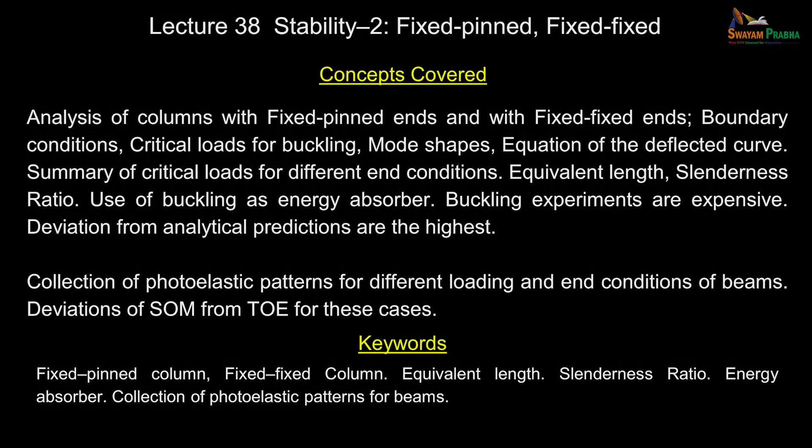Let us continue our discussion on stability. The whole idea is when the column reaches the critical load, without a warning, it buckles. That is where the stability problem becomes very critical, and you need to find out the critical load. If you don't know that, you will have surprises in your structural response. So how do we handle a problem related to stability to start with?

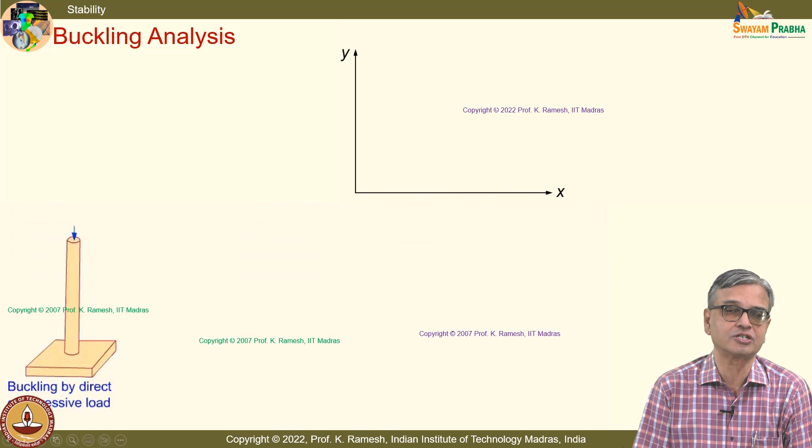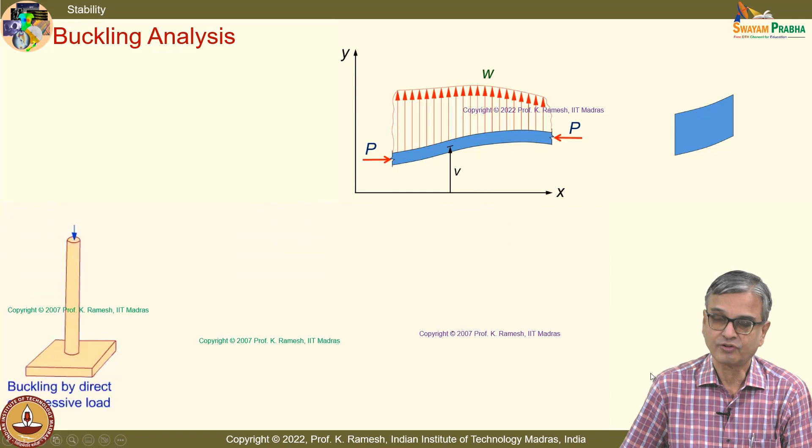Mathematically, even though we have said we are going to live in small deformation, in order to investigate stability, you take the beam as bent. That is very, very important. When the load reaches a critical value, without a warning, it buckles. Buckling can happen in a column like this. It can happen in a beam. It can also be precipitated by a shear.

In all these cases, what we have done is we have deliberately taken this as deformed, and only when it is deformed, we are in a position to take an element. You get an extra term, the compressive load separated by a small displacement delta V. On the other hand, when we analyze a beam for deflection, we have consciously taken this as undeformed configuration. You get the point? That is the fundamental difference.

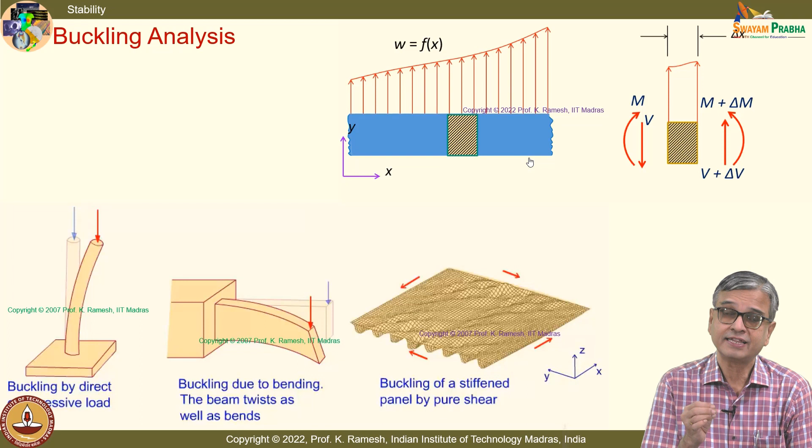When we did the deflection analysis, we did not consider the beam as deformed. We solved it in undeformed coordinates. On the other hand, when you come for buckling, we consciously take that as deformed. Only then are we in a position to write the mathematical expression.

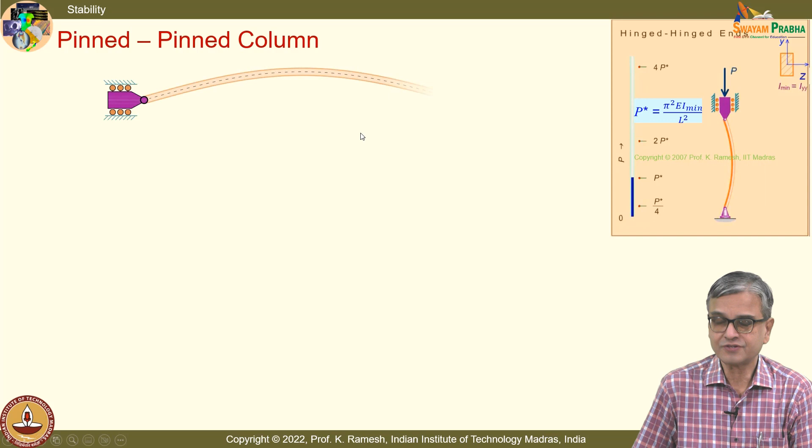First we looked at the fixed-free case, that is a cantilever. Then we moved on to the pinned column. And actually the pinned column forms the basis. If you look at the critical load, I have also put this as P star, that's equal to pi squared E I minimum divided by L squared. All the other cases are compared with this P star.

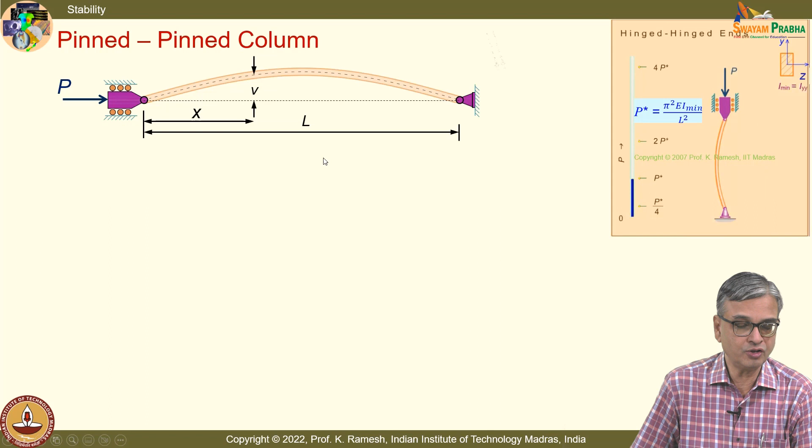The boundary conditions are very easy to write, because I have a pinned joint: at x equal to 0, V is 0; at x equal to L, V is also 0; and at both ends, the bending moment is 0, which in turn gives d squared V by dx squared equal to 0. Even though I have written EI d squared V by dx squared, you should read that as d squared V by dx squared, as simple as that.

What we did was, we got the governing equation, and we did not solve it directly - we took the solution from the mathematical analysis, and then simply took V as C1 plus C2x plus C3 sin lambda x plus C4 cos lambda x. I have 4 constants and I have 4 boundary conditions, so we had enough data to proceed.

When we substitute the boundary conditions, you get these expressions. See, this is not in one order, so you have to figure it out - that's also a good reason why you have to apply your mind to unravel this. From problem to problem, it is slightly different. Intentionally it is done so that you stay alert.

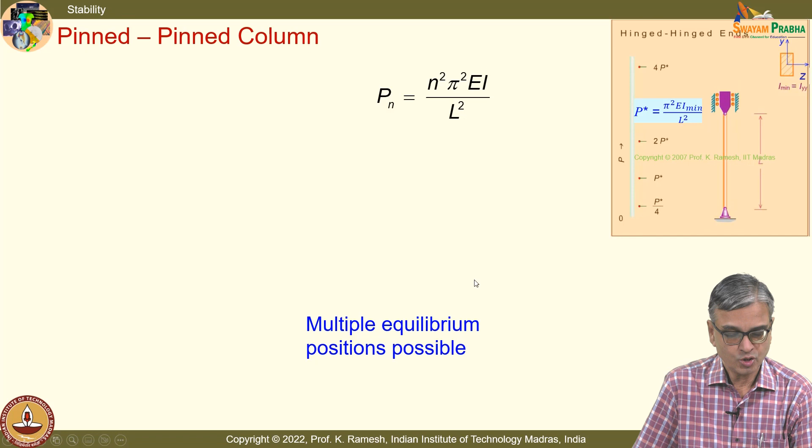In order to have a non-trivial solution, I need this determinant to go to 0. That gives me an expression wherein I get the critical load as n squared pi squared EI by L squared. You have multiple equilibrium positions possible. When n equal to 1, I have mode 1, which has a buckling shape like this: pi squared EI by L squared.

When n equal to 2, I have P2 as 4 pi squared EI by L squared. That means if I increase the load, you are expected to get that mode shape. In practice, you will have to do something - this is the point where it crosses 0, so you have to make this 0 externally. Only then, in buckling problems, you will see that.

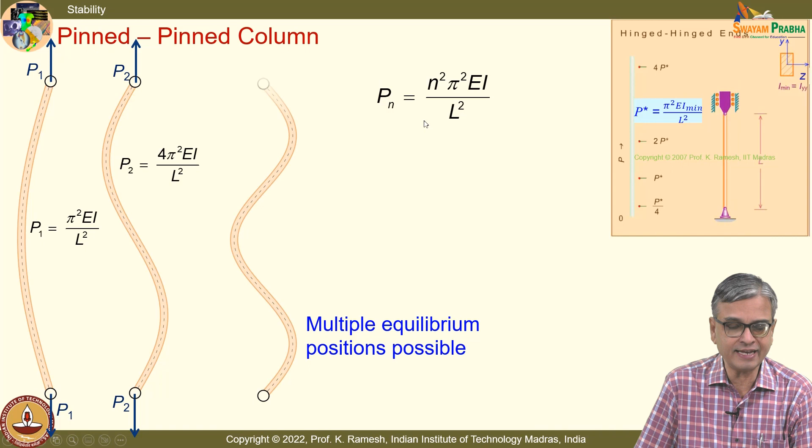I will also show you in an experiment what we have done. So what you find is, as n increases, you have different equilibrium configurations. The column cannot remain straight - that is the understanding we get out of it.

So the critical load is the least one, pi squared EI by L squared, and it is better to recognize I as I minimum when I have a non-circular cross section. In a circular cross section, every diameter has the same value of moment of inertia, and it can have buckling in all 360 degrees.

Once you solve this, you get the displacement as C3 sin lambda x, and as I mentioned, you are not in a position to calculate the value of C3. It is indeterminate, mainly because we have linearized the governing equation.

The moment curvature relation was non-linear. In deflection, we said we are going to live with small deflection and ignore the second order effects. The same approach we have followed in buckling also.

In fact, if you consider the non-linear relationship of moment curvature, it is possible for you to evaluate, for a given load, what is the coefficient C3.

If you look at the buckling problem, what is more important is the value of the critical load. How the buckled shape looks is of secondary importance, because the functionality of the column is already disturbed. So the primary importance is to get the critical load, and we also do not have the mathematics to investigate what happens once the critical load is reached, because the deflections become very large.

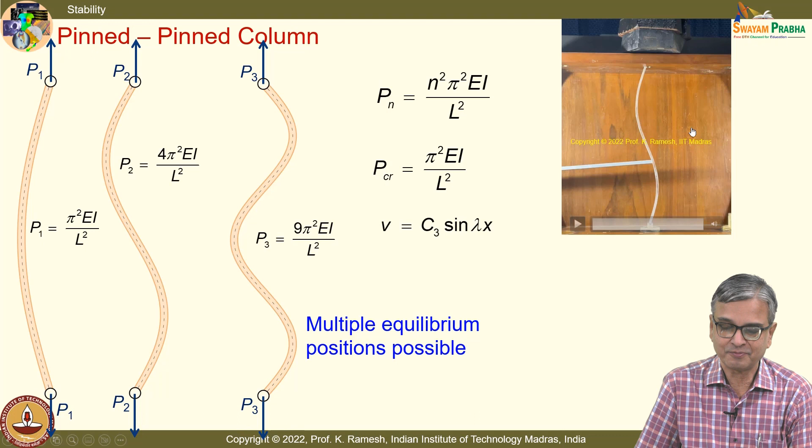This shows experimentally I can get mode 2, but I have to do something for the inflection point, only then I will be in a position to see that. Sometimes you will see such beautiful curves that you will wonder, can a column which looks so strong otherwise have a shape like this? In order to drive home that point, we have got this experiment done, and it has come out beautifully.

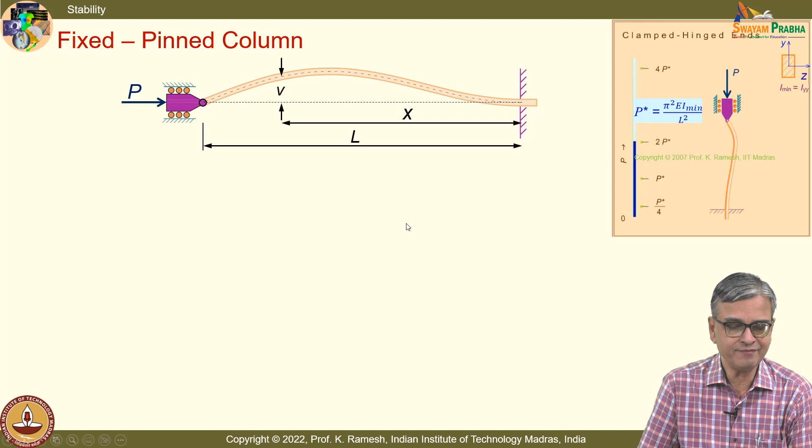Next, we move on to the fixed-pinned column. What is the difference? Only in the boundary conditions. You have already seen how to handle a fixed end and how to handle a pinned end. So it's a question of the equations having a different form, that's all, and you have to simplify them. I leave that as an exercise, but I will show you the final results.

You have the boundary conditions like this, and this is the solution we start with. When you substitute it, as I have told you, this is not in order, so you figure out whether the equations are correct. That's also an exercise for you, to see that you have followed what is done in class.

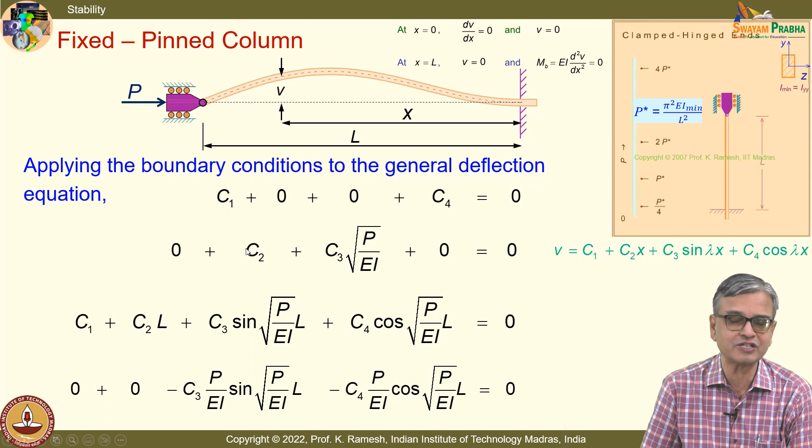As we have seen earlier, for a non-trivial solution, I need this determinant to go to zero. What happens is, we have handled fixed-free, that's a cantilever, and the equation was simple and straightforward. When we looked at pinned-pinned, the equation is also very simple. But once you come to fixed-pinned or fixed-fixed, the equations are a little more complex, and you will have to apply your mind to solve it.

So what I am going to do is have this go to zero. You have to recognize this should be translated into: tan of square root of P by EI times L should be equal to square root of P by EI multiplied by L, and this needs to be solved. One can solve it easily by a graphical method, or analytically also you can solve it.

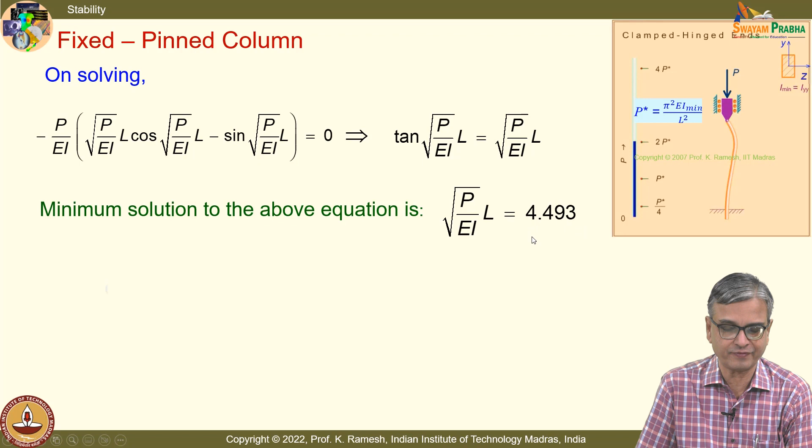And when you solve it, this happens to be a value of 4.493, and it's inconvenient to look at as this number. We'll also simplify it. So the critical load is obtained as 20.19 EI by L square, which is approximated as 2 pi squared EI by L square.

I have an ultimate objective: we are going to take the pinned column as the basis. From the length of that column, we will also visualize the length of other end conditions. Buckling is one problem where the critical load drastically changes because of the end conditions.

And in reality, how do we have these end conditions realized? We will also have a discussion on that. From that point of view, if you want to compare, rather than looking at this as 20.19, it is convenient for us to have this as 2 pi square, because pi squared EI by L squared is your basic expression.

So I can say what is the value of the equivalent length of the column. And once I go to the deflection curve, it's a very long expression. Please make a note of this.

I have this as V equal to C3 multiplied by minus square root of P by EI into X, plus sine of square root of P by EI into X, plus tan of square root of P by EI into L, multiplied by 1 minus cos of square root of P by EI into X.

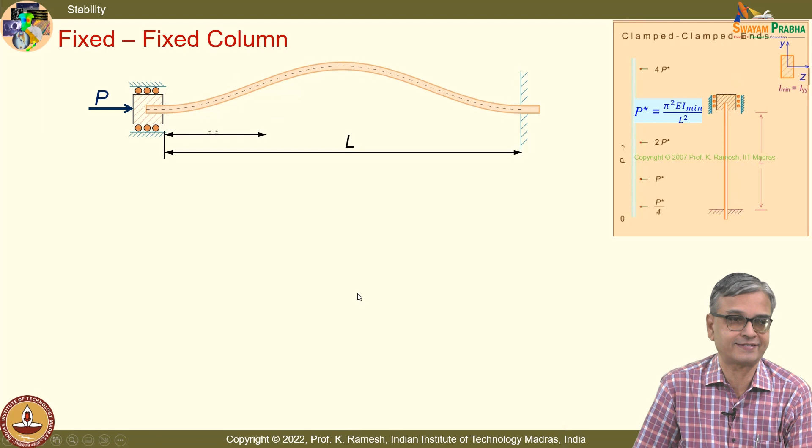Then we move on to the fixed column. Once I have a fixed column, you will recognize that you also have slope 0 at both ends, so the boundary condition is like this. All of this we have looked at even when we discussed the principle of superposition, when we wanted a deflection and recognized a fixed end, a pinned end, and a free end. We have learned how to write the boundary conditions. So the boundary conditions remain the same, but the governing equation is different.

The governing equation, what way have we obtained it? We have deliberately looked at the deformed configuration. This is the only problem in this course where we write the governing equation by looking at the deformed configuration. So that is a fundamental difference in the basic analysis here.

Once I apply these boundary conditions to the expression V, I get 4 equations. Here again, the sequence is not in the same way that I gave the boundary conditions, so you figure it out and alert me if there are any typographical errors.

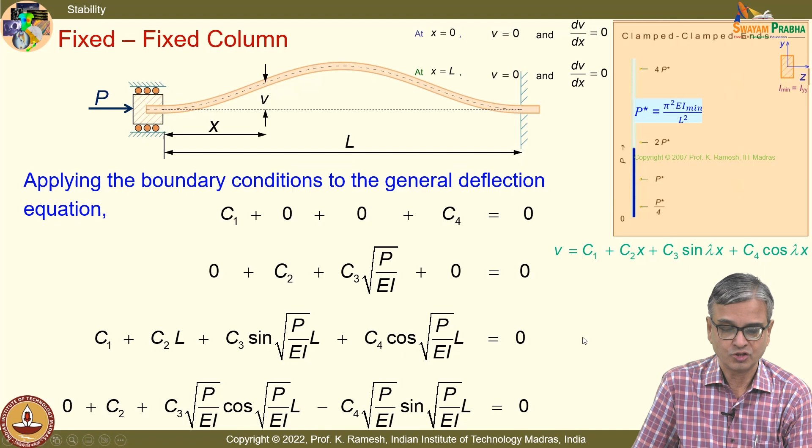For a non-trivial solution, I should have this determinant go to 0. So when I do this, I get an expression like this. Tell me what way I should translate this into a condition to find the critical load. When I expand the determinant, I get an expression that should equal a value of 2. Can you look at what way we can impose this condition?

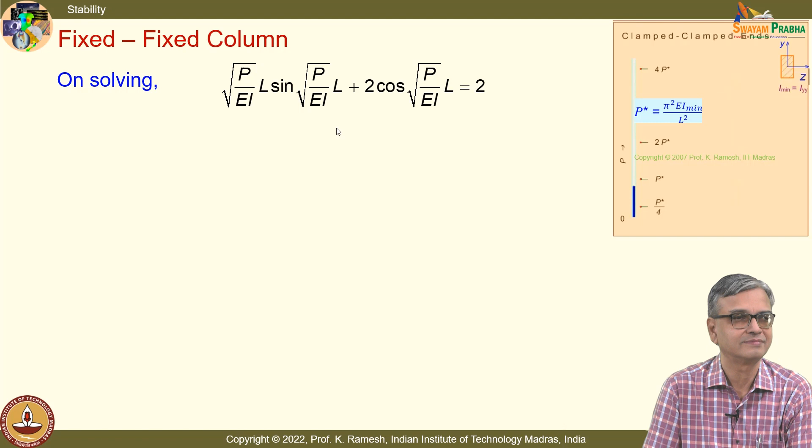Just read the equation, you all have the mathematical ability to recognize this. When will this expression go to 2 in a simplistic manner? This goes to 1 and this should go to 0. So I should illustrate the condition as: sin of square root of p by EI times L equal to 0, as well as cos of square root of p by EI times L equal to 1.

Earlier, in the pinned case, we had sin lambda L equal to 0, that was only one condition and we solved one problem. But now I should have both of these go to their respective values as indicated. This is possible when square root of p by EI times L equals 2n pi. The difference comes only there; otherwise the mathematics is simple and straightforward.

Only when you look at the final determinant expression, how do you represent it in a convenient form to get the critical load? The focus is to get the critical load. So from this I can easily find the critical load, which comes out as 4 pi squared EI by L squared.

So look at this, if I have a fixed condition, the column is very strong, 4 times the load it can withstand in comparison to a pinned column. That is what is shown as 4 P-star here, and P-star is defined as pi squared EI minimum divided by L squared, because I have taken a rectangular cross section.

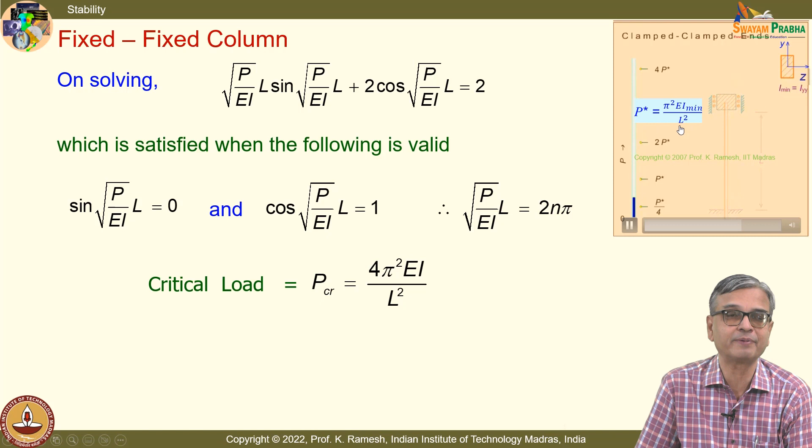And here again, if you look at the equation of the deflection curve, it's very similar to what we saw in the fixed-pinned case, and if you look closely, only this term changes. You write down the complete expression: V equals C3 multiplied by minus square root of p by EI times X, plus sin square root of p by EI times X, plus tan of square root of p by EI multiplied by L by 2, all multiplied by 1 minus cos square root of p by EI times X. So there's only a small difference between what we saw in fixed-pinned and fixed.

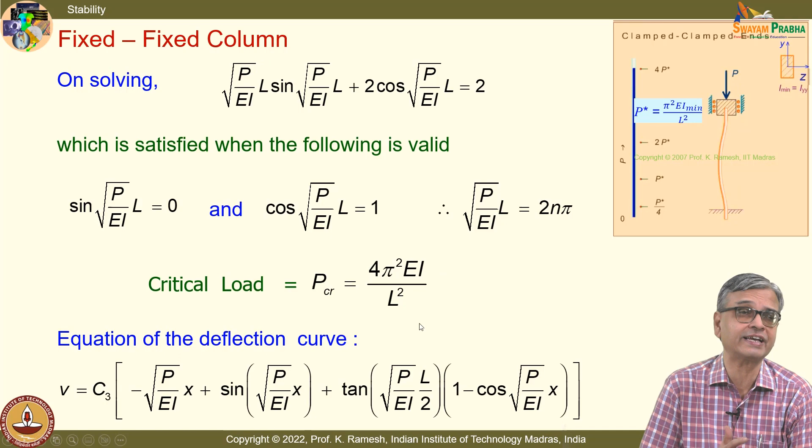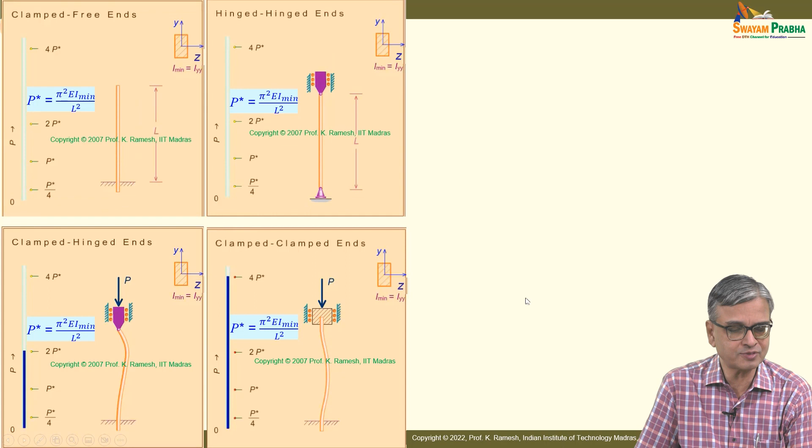And what is significant here is that the critical load is very high, meaning you can be a little relaxed when you have good end conditions. Just observe the animation, it is very nicely done. It will drive home the point of how the columns are relatively placed in terms of critical load.

Fine, you have a visual representation, and now I am also going to provide an excellent summary.

In the case of clamped free, the basic expression we had was when the determinant goes to zero: cos square root of p by EIL equal to zero. That gave me p critical as pi squared EI by 4L squared, and you could also get the deflected curve as V equal to C1 times 1 minus cos lambda x.

When we went to pinned end, we had sin square root of p by EIL equal to zero. This gave me p critical as pi squared EI by L squared.

In all my expressions I have just put I, but you must recognize that it should be I minimum, which is shown in the diagram but not in these expressions. So recognize that you should put this as I minimum.

When we moved on to fixed hinged, I get the governing expression as tan square root of p by EIL equal to square root of p by EIL. This should be satisfied. From this I get the critical load, which we rewrite as 2 pi squared EI by L squared.

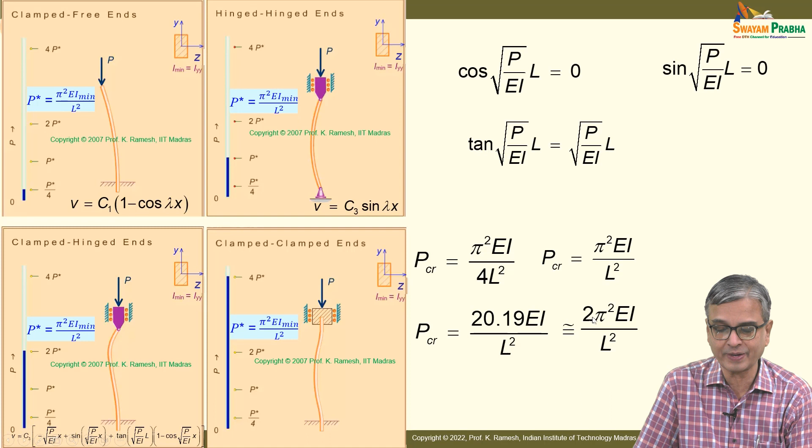In the last case, the condition was I should have sin square root of p by EIL equal to zero, as well as cos square root of p by EI multiplied by L equal to 1. So this is satisfied, and I get the critical load as 4 pi squared EI by L squared.

In all these cases, you have the deflection also. It is a very nice summary of what we have discussed so far. At a glance, you get what happens, and visually you see what is the shaded region.

If the shaded region is the longest one, then you have the strongest column, okay, and it is all compared with respect to the pinned end.

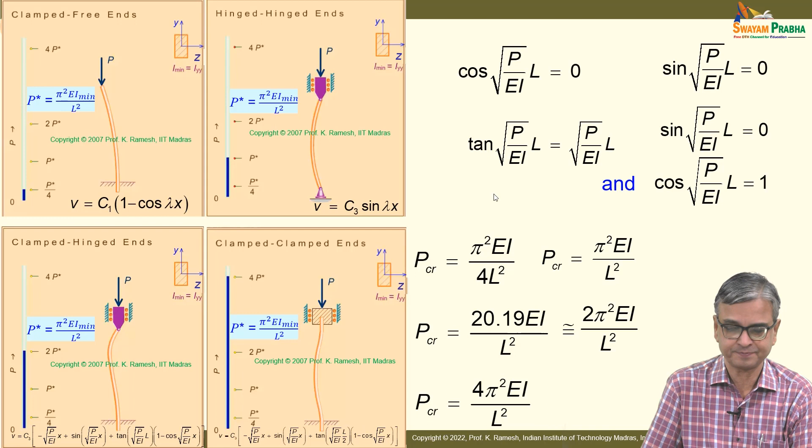Now the question comes, why do we have a pinned end as a basis? If I have a pinned end, it can easily rotate. Only in your course, problems are posed that this support is pinned, other one is pinned free, other one is fixed free. If you are asked to go and look at the real structure, you will have to idealize depending on the constraint in the problem as one of these supports.

So now what I will do is, I have two holes, okay, I suppose you are able to see two holes. I have put one pin and I am able to freely rotate. What do you say as fixed end? It should not rotate. Fine.

Suppose I put another pin, probably you can see this better. I have two pins and I am trying to rotate. See, the pin is not of the same size as the hole.

Suppose I have the pin of the same size, I am able to have some rotation. That is because the pin diameter is smaller than the hole diameter. Suppose I have a properly made pin, even this rotation is not possible. In other words, when I have even two pins, it prevents rotation.

That means if you want to idealize this as a fixed end, you are also justified, even though you make a small error. So in reality, you do not know how the constraints are.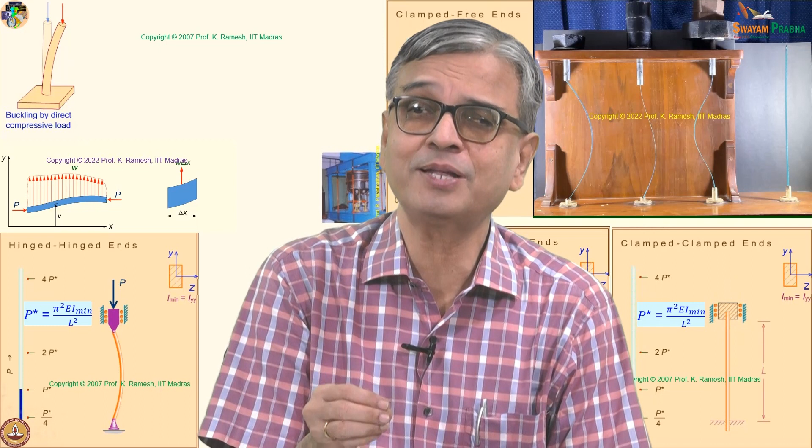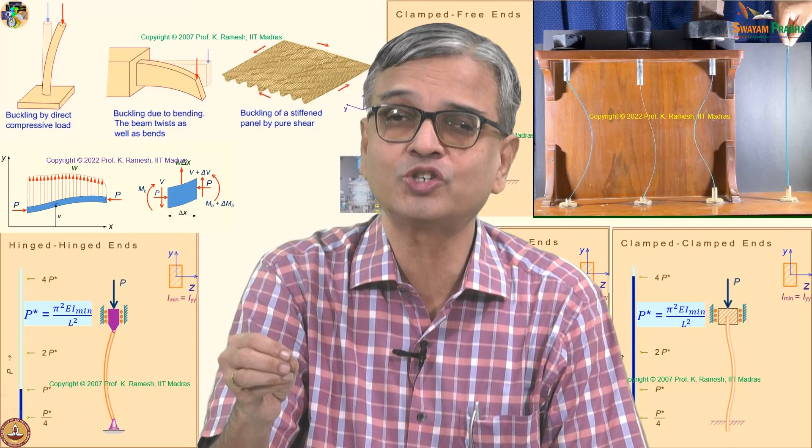Why was that done? In your rigid body mechanics, it is sacrosanct. You should know when the symbol given is a pinned joint, put the boundary conditions appropriately. When it is a fixed joint, put the boundary conditions separately. But all that is indicated by a symbol, we had symbols for that.

You will not have symbols attached to practical structures. While learning the course, you need to have those symbols for you to appreciate the different joint conditions. When you come to field practice, there is always a dilemma whether it is a pinned joint or a fixed joint.

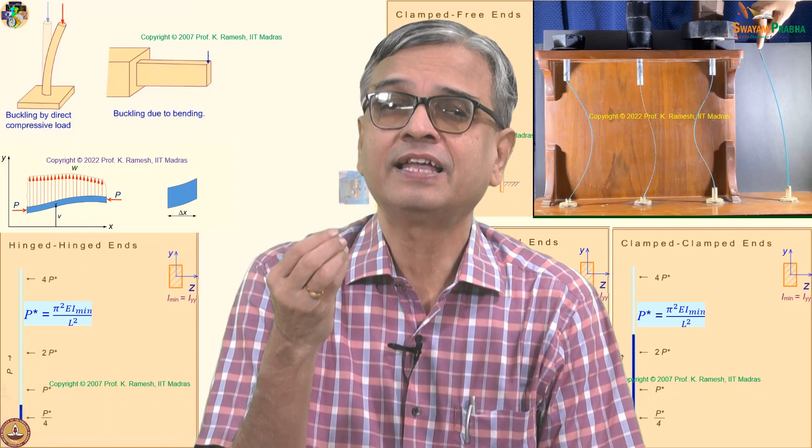We have also seen in certain applications, the end conditions are not influencing much. Definitely in the case of buckling, it has significant importance, but it is a favorable direction. Let us go back to Euler buckling again, because when we started this class, you may not have observed certain nuances very closely.

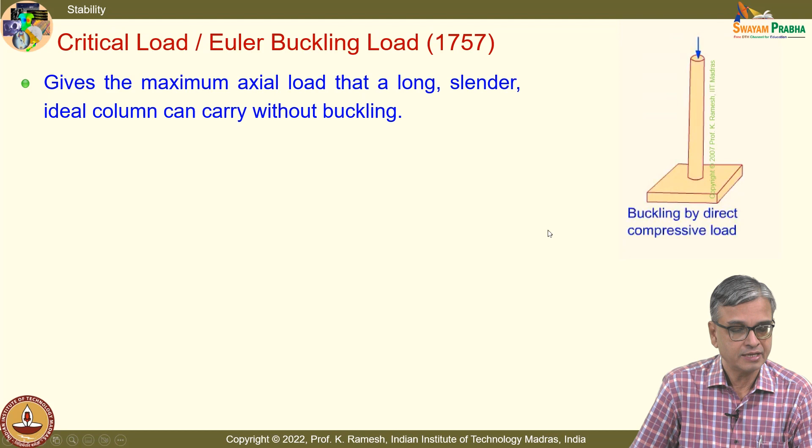What I have here is, as the load is increased, suddenly it buckles without a warning. That you should recognize, that is why buckling is so important from an analysis point of view. What you find is it causes the column to lose its stability. The introduction of the slightest lateral force will cause the column to fail by buckling.

I have always been showing experiment, analytical justification, and numerical justification. One of the difficult experiments to conduct are buckling experiments, because the slightest lateral force can come from imperfections in the material the column is made of, how the column is made. That is very difficult to model.

We have also said that we have an elastic continuum, and that is how we have developed the mathematics. Among the several experiments, the costliest are buckling experiments. A million dollars have to be spent in making the specimen appropriately. Also, the deviation between experimental observation and analytical calculation is maximum in buckling experiments.

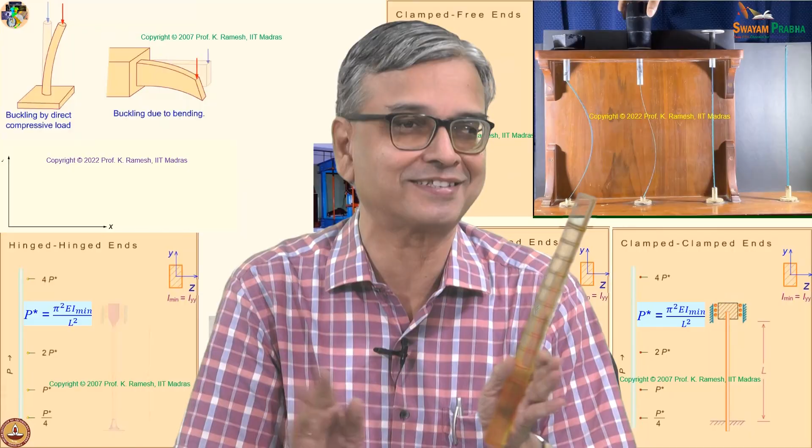Please understand that. When you do your experiment, you find deviations, don't get annoyed, because you cannot make anything perfect, since the analytical model requires a perfect specimen. A perfect specimen is extremely expensive. It's not just two to three orders, its order of magnitude is very, very high.

We have also said that this is credited to the mathematical genius Euler, and we have looked at the physical difficulties he had. With all that, he was able to do it.

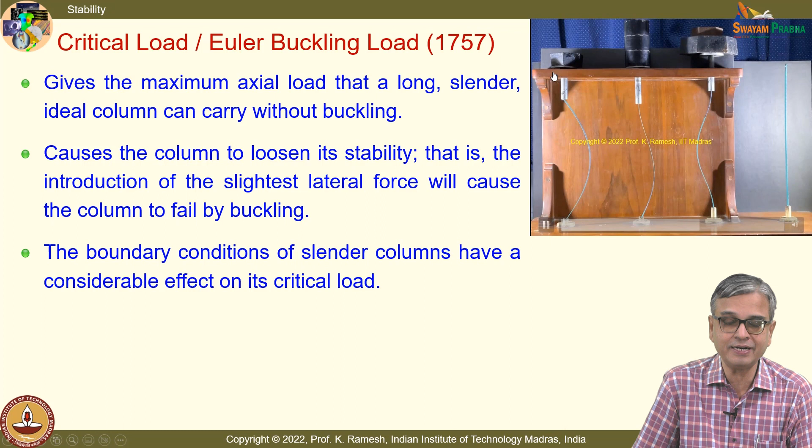Look at the deflected shape. I have already said these experiments are indicative of the relative merits of the capacity to withstand the critical load, because you can see the weights put. If I have to perform the experiment in an idealistic manner to get the critical load, I should have provision to vary the load continuously. The loading system I have shown is not right, because I have discrete loads, and these discrete loads may miss the critical load.

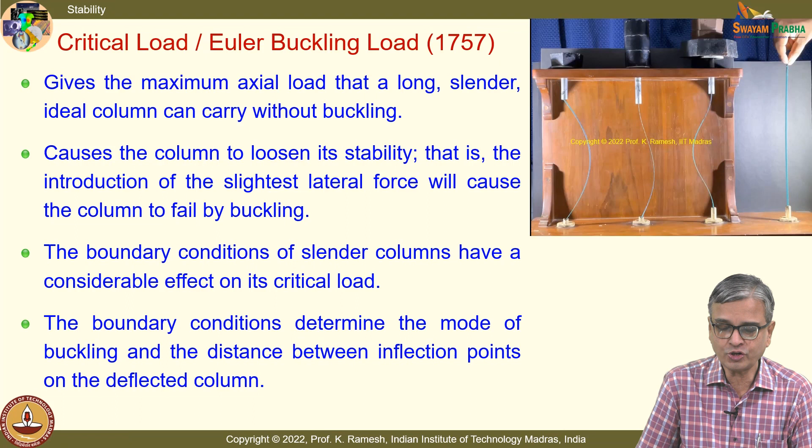What we have also seen is, even if you go beyond the critical load, you will see a deflected pattern so beautifully in your experiment, but your analysis may be difficult. That is different. I have also used this to show another aspect: we have discussed that what you have here are neutral equilibrium positions.

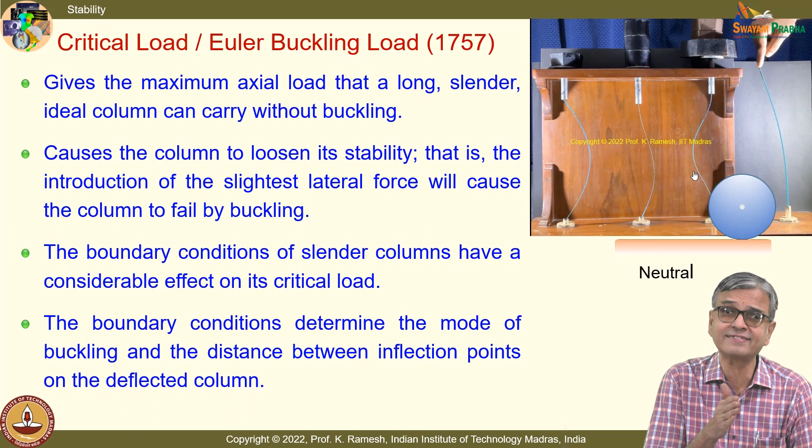When I redo this, you can recognize this has already buckled, this load is higher than this. Here you can see it in a subtle fashion, and you can see it in a definite fashion here. I have one equilibrium position, I apply load, I have another equilibrium position, I apply another load, I have another equilibrium position. So these are all neutral equilibrium positions, but transition from one to another is sudden. So it loses its stability.

I said whether buckling is useful or not. People have used it in toys. People have also used it in electrical switches, where snap buckling is used for making positive contact.

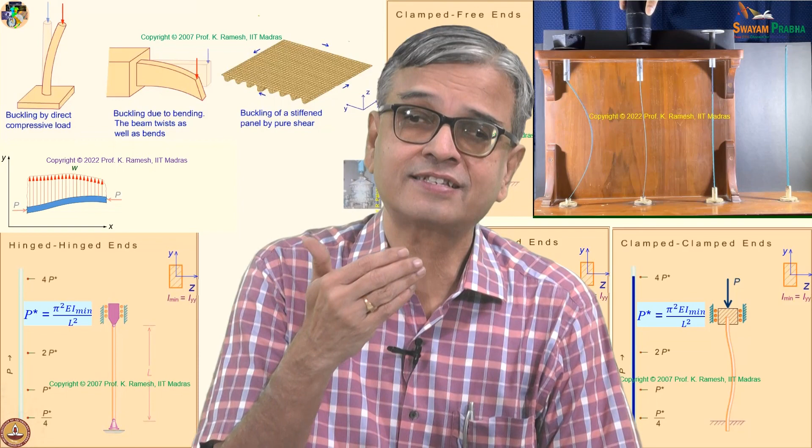I am now going to discuss the concept of equivalent length. I take the pinned column as a basis, I call this LE equal to L. I can also visualize, if I have a longer column, it is dangerous; a shorter column is better. That is the way you have to look at it. The longer the column, the more its tendency to buckle.

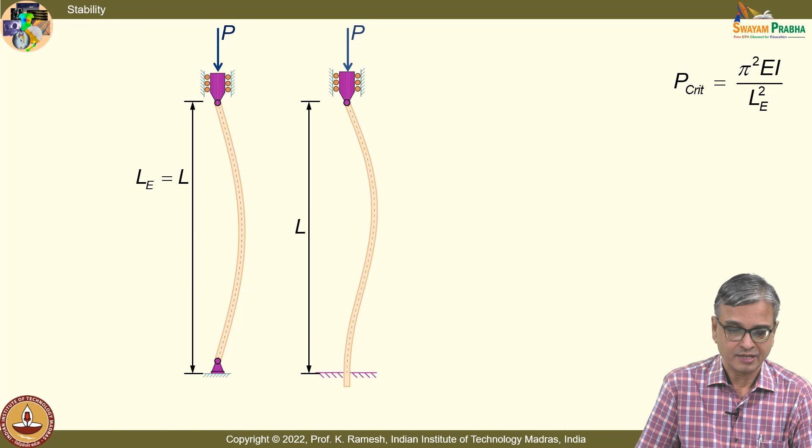If I go to fixed-pinned, we have already got the expression. Now we are going to have a relook from a different perspective. I call this LE equal to 0.7L. If I have a fixed-fixed column, it behaves like half the length of the pinned column. Suppose I have a cantilever, it behaves differently, as if it is twice the length of this column. That means it can have only the least critical load possible, while the fixed-fixed will have the highest critical load possible.

So another way of looking at a column problem is to compare it to a pinned column, and from that visualize the effective length of other columns. So from the point of view of critical load, the boundary conditions are very significant. In other problems we have looked at, the boundary conditions give you lower bound and upper bound solutions. You can do the same thing for buckling also, because physical problems do not have a label attached. You have to find out from the constraints to idealize, and true fixed conditions are always difficult to simulate.

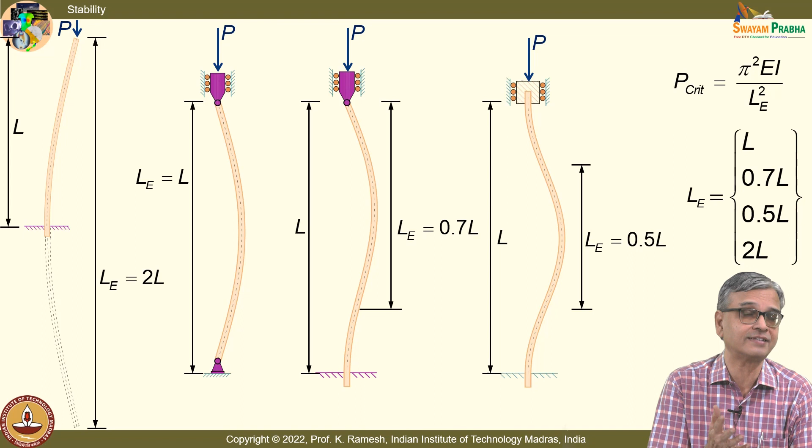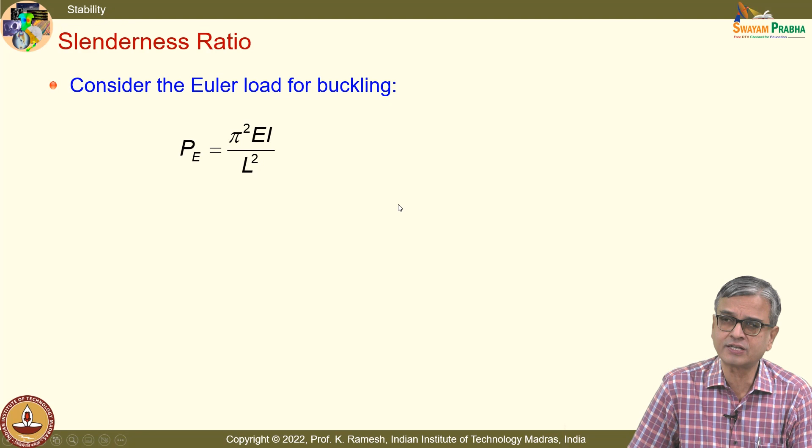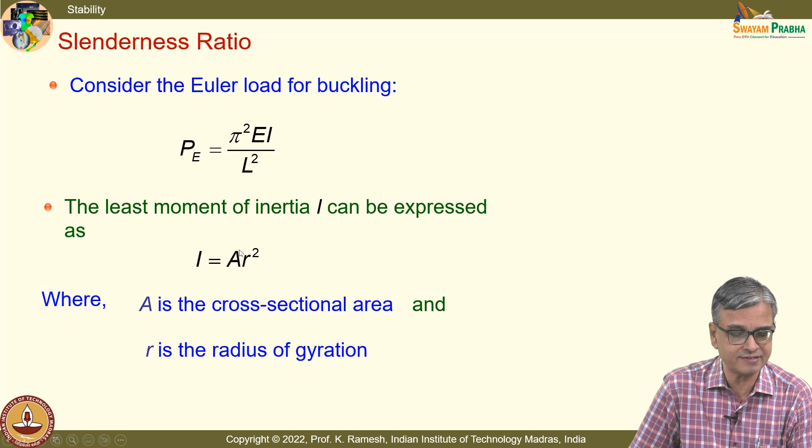You also have another concept called slenderness ratio in column buckling. What you do is write the moment of inertia as A r squared, where r is the radius of gyration. So instead of looking at critical load, I can also get critical stress P by A, which equals pi squared E by L by R whole squared. So L by R is the slenderness ratio, and if L is larger and larger, the column is more flexible.

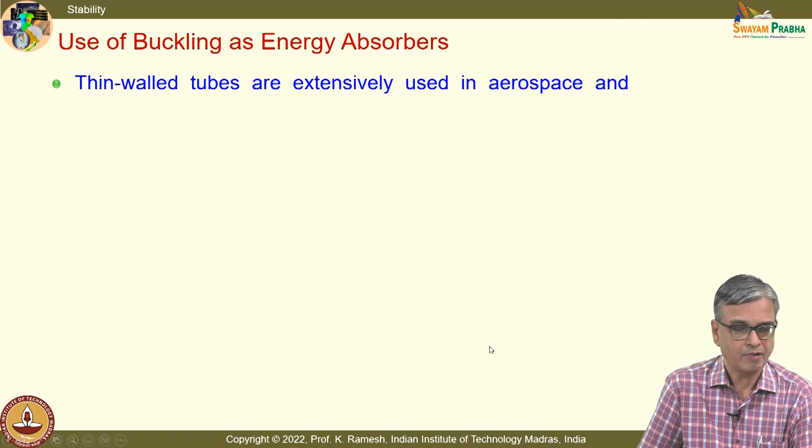So slenderness ratio is a measure of the column's flexibility. You do not want that to be flexible. In a structural application, you do not want that to be flexible, you want it to be strong enough to withstand the load. Are there other applications?

I have always gone beyond the basics of the course to motivate you to see what all you can learn in future. See, use of buckling as energy absorbers. Thin walled tubes are extensively used in aerospace and automobile industries as energy absorbers. The most important phenomenon of the axial crush tube is to absorb and convert a larger amount of kinetic energy into plastic strain energy. During progressive crushing, lobes form sequentially, and it is subjected to large strain without any material failure, because the idea is to protect the occupants.

You also have metallic foams. That is another way of softening your crash victims. Another way is to use thin-walled tubes. So it is of importance to study this phenomenon in detail for crash-worthy design.

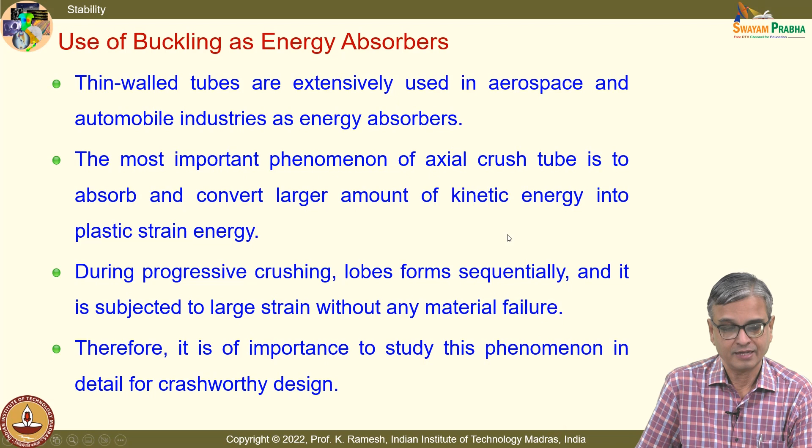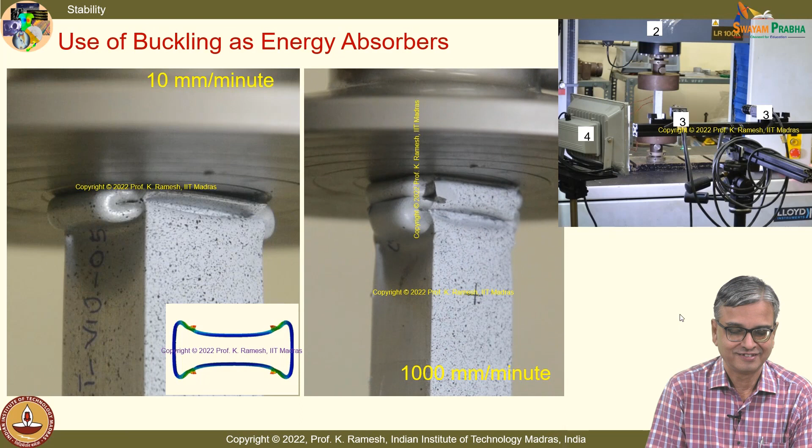Now what I am going to do is increase my speed of rate of loading. I have said rate of loading is different, and look at how beautifully the patterns develop. Don't you think this is very, very interesting? So that means the crash tube is doing its job very well in absorbing more and more energy, so you can be protected.

Like engineers, future engineers, you have to develop all of this for passenger car protection.

I think you can see the animation again. This is so interesting to see. What is peeling off is the paint that is put for image correlation, because the paint should be adhered to the surface very well, since it is an aluminum tube. In some places it is too smooth, so it does not adhere.

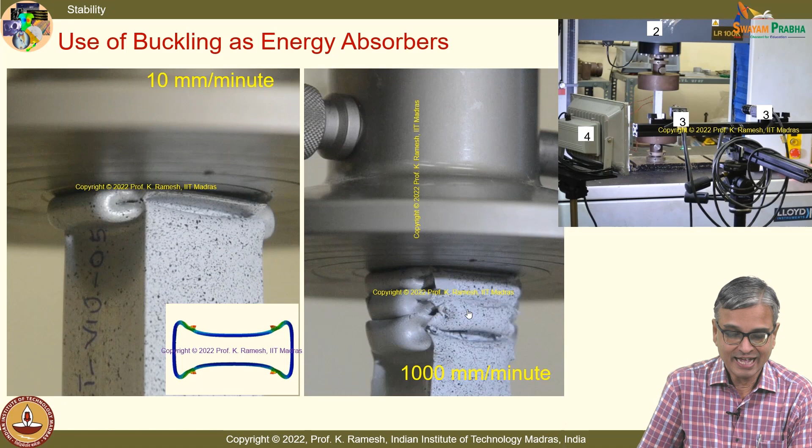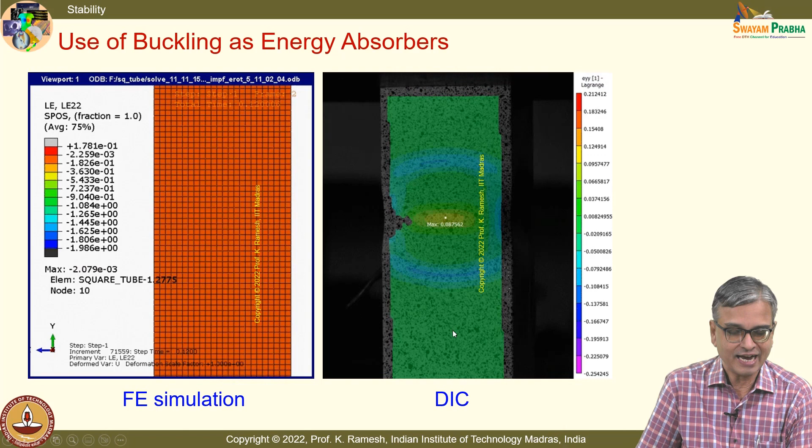Not only this - my students have always compared numerical as well as experimental results. Very few labs across the world do these comparisons. Only when you compare do you burn your fingers and understand you are modeling correctly. Look at here, this is a non-linear finite element analysis, and this is a digital image correlation. Look visually, the patterns are quite identical. This is a very, very complex problem - it is a non-linear finite element analysis, not a simple problem to handle.

So this should give you motivation. What you have learnt as strength of materials is only the basics. They are very, very important. Fundamentals are very important. And you have to graduate and solve very challenging and complex problems of today.

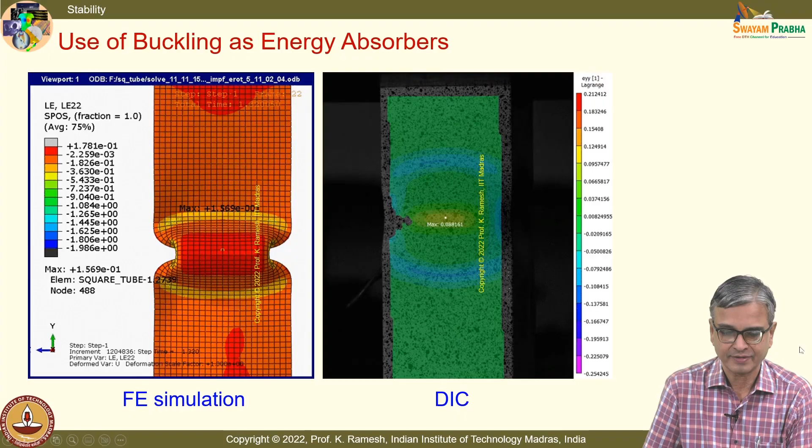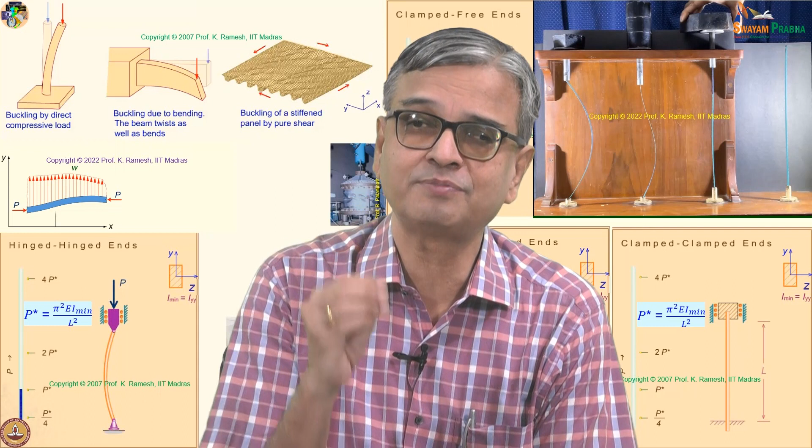So that requires your training in a numerical technique as well as an experimental technique. In this course, we have also looked at extensive use of photoelasticity to understand the concepts related to stress, an advantage even the developers did not have. They had done crude experiments. This is a subject which developed based on experiential knowledge, not theoretically. And wherever possible, I have emphasized where there is a deviation.

When you are looking at shear stress, there are many places where you can ignore it, but you cannot ignore it near the load application point. There, your strength of material result of parabolic variation is absurd. The shear variation is very high just below the boundary, but on the top surface it is still zero, because it has to satisfy that free surface requirement. And these stresses are comparable to your bending stress, so failure can happen unless you strengthen this. When you are doing the design, strength of material helps you away from the zone, away from the load application and end conditions. You have a solution from strength of materials. But even that, was it right?

We have also looked at, you can actually take a photograph if you want, because they have very nice, beautiful patterns. You don't get them anywhere else. That is the reason why I thought I should have it here.

I have this uniformly distributed load. With uniformly distributed load, was strength of materials right in all respects? I have also pointed out where it was deviating. Okay, we will see that.

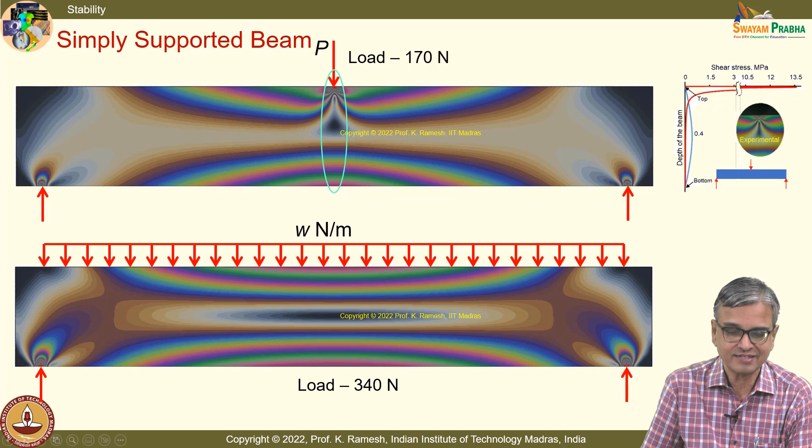What are the two quantities I showed? It's again very important. This is correction to sigma x. It's no longer varying linearly, it is non-linear. And in addition, you also have sigma y.

Can you see from the pattern the existence of sigma y? Or are your eyes sensitive enough, tuned to that? Look at what happens at the bottom, look at what happens at the top. Do you find there is asymmetry here? The fringes are well developed here, fringes are not fully developed. See, beyond this red, some slight shade of color coming out. The width is broader, the width is shorter. You have to be sensitive.

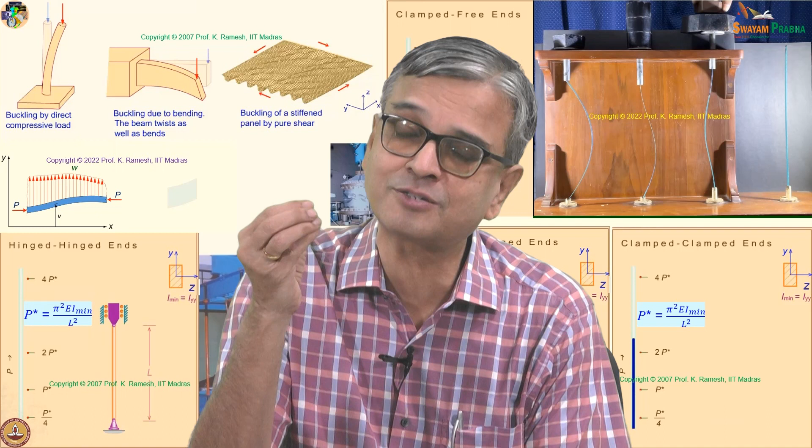The experiments reveal truth, please understand. You may make certain simplifications for the purpose of your analysis. You may say curvature is linear, but experiment recognizes this as non-linear. You may say shear stress is small, but experiment recognizes even that small shear stress, and the entire experimental pattern is in tune with that. There are no approximations in an experiment. So you should do a careful experiment and interpret every aspect of the experimental analysis.

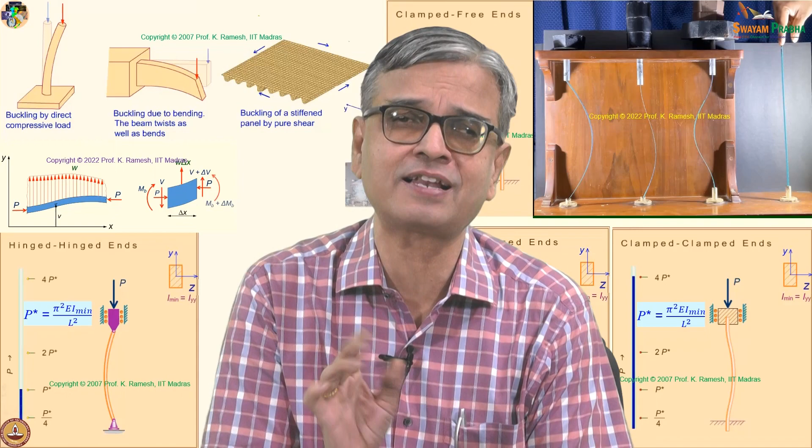Don't ignore it. Don't come out and say the equipment is 30 years old, so I see asymmetry, and then walk away. Like in your history books, what each king has done, he has planted trees on either side of the road, same answer for every king. Have you not done that in your history in schools?

Whenever you find deviation between experiment and your mathematical analysis, the blame should not be on the equipment, but on the performer. The performer has to be careful and systematic in performing the experiment. These are the usual ways people wriggle out of real challenges.

In buckling experiments, even when you do a careful experiment, the deviations are very high because you cannot get a perfect material. You cannot have a perfect cylinder, you can't have a perfect sphere free of defects. So they are all very, very sensitive.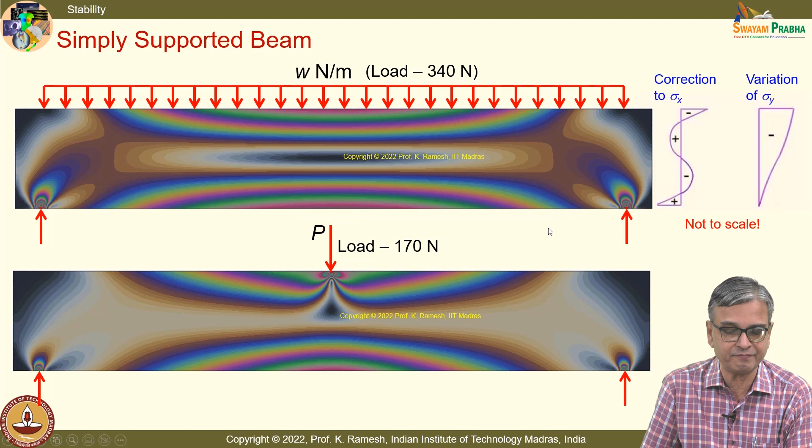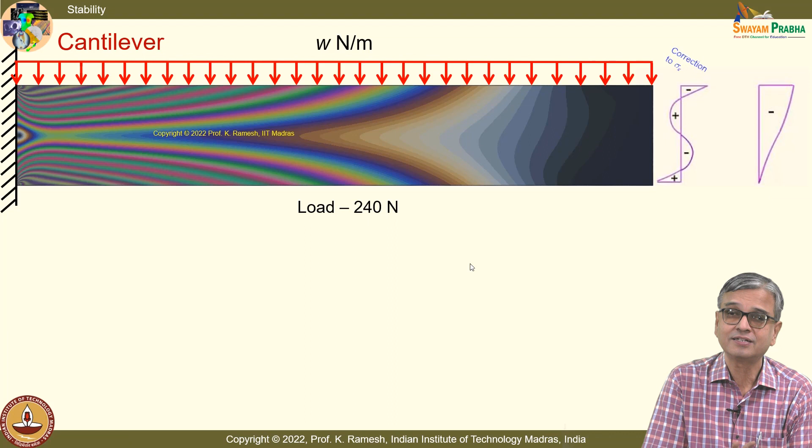We have seen this for a simply supported beam, and we have also done it for a cantilever. So when I have a cantilever with a distributed load, you should anticipate, with a pinch of salt, that strength of materials is reasonable for you to accept, but theory of elasticity will always show other quantities. They are second order effects. I have also put this not to scale, meaning this is very, very small, but you should recognize that there are deviations.

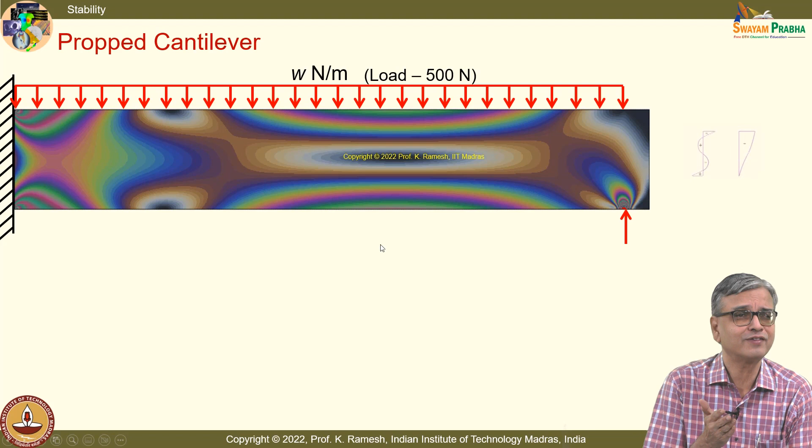But look at all the nuances and the small changes are captured in the experiment, and you find beautiful patterns.

See, this is like a cantilever, this is like a fixed beam. You see a combination of both because when I change the end condition, it also gives you an appreciation of why we want to look at different end conditions. From a mathematical analysis, we should understand what is happening. In a physical system, you have to apply engineering acumen to model these end conditions. Only then you become a good engineer.

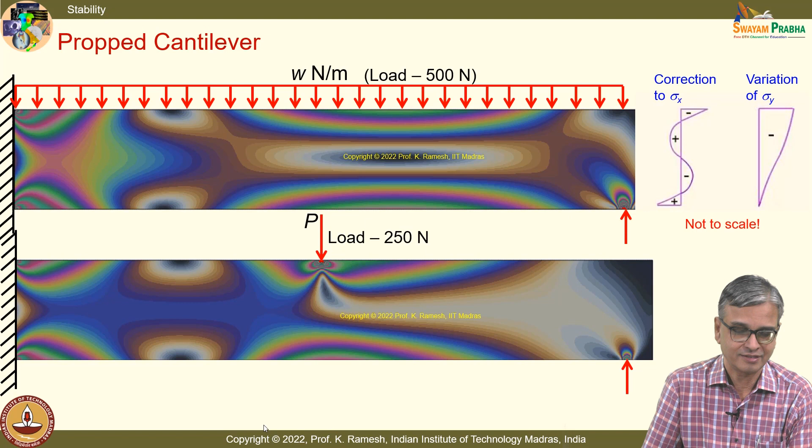If you keep solving problems where somebody has coined it as fixed support or pinned support, that is not going to make you a good engineer. You should know what the limitations are, and if you come across a limitation, how to wriggle out of it. So look at getting the lower bound result and the upper bound solution.

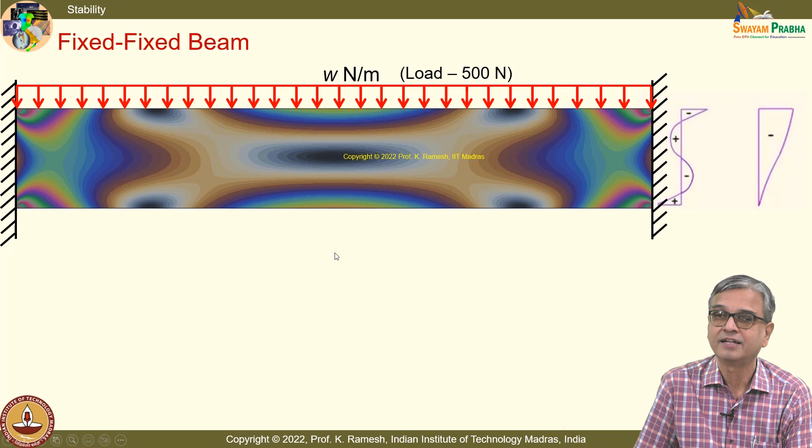Suppose I have this as fixed. In all these cases you will have this variation, because when I have a distributed load, I am compressing it deliberately, and you will see the asymmetry. Asymmetry is seen here - I could see orange color here, but I could not see that orange color here. Is the idea clear? So the experiment recognizes the presence of sigma y.

Just because analytically you cannot handle that, we have simplified it. Because the error introduced is small, we have ignored it. As a designer, what way could we accommodate this? Go and have a careful factor of safety. Is the idea clear? So we accommodate it as practicing engineers at some part of the analysis.

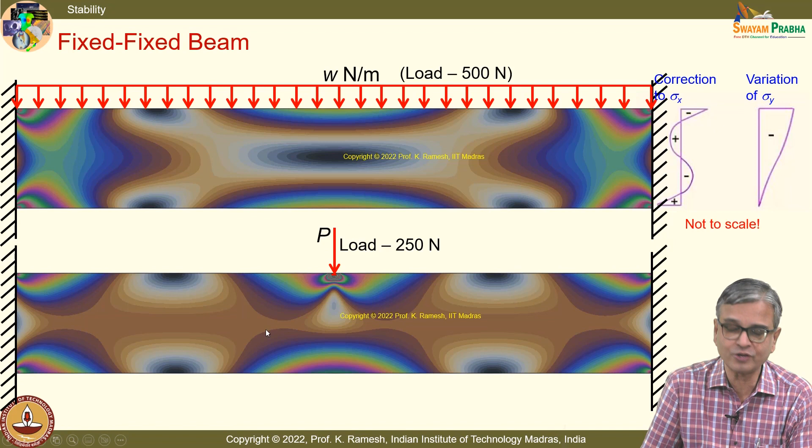We don't ignore it. If you ignore it, you will have surprises like bridge collapses after a few days of inauguration. So these are all very beautiful patterns that you have when the end conditions are changed.

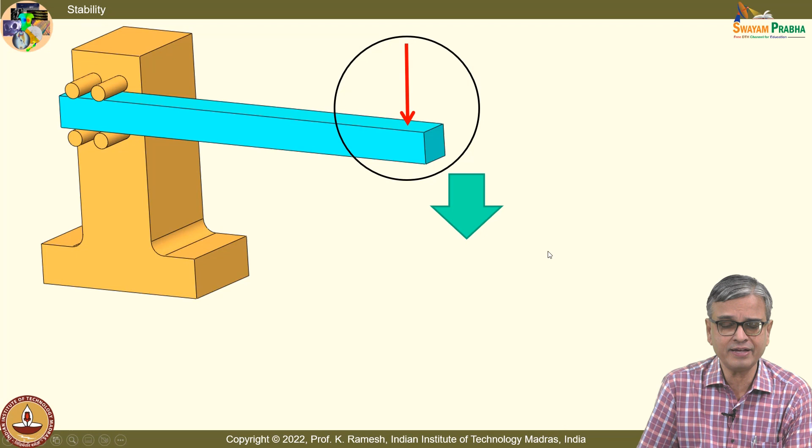I have also emphasized that I can have a fixed end, but just by two supports. I felt some of you should definitely go and see my engineering mechanics discussion on force systems, equilibrium, and also how to move a force from one point to another point. You have to master it - if you master that, you have a better grip of the subject.

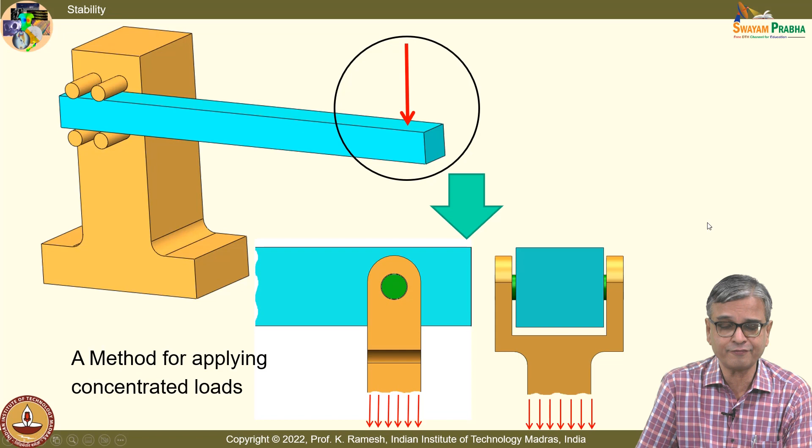I say in a simplistic manner that a load is applied. How is this load applied? If you look at it, I have to take a pin and then pull it like this. From a side view, it will be like a pin resting on a hole. If you look at it, we make several modeling steps - all that is taught in your rigid body mechanics. If some of you have not looked at it carefully, please go and have a careful look.

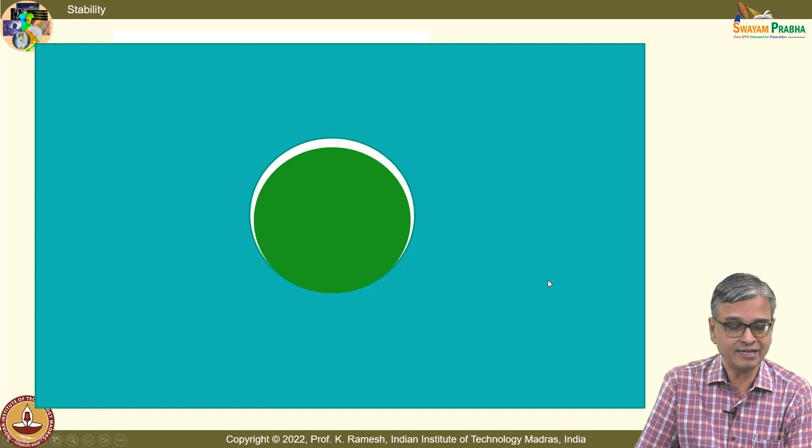So when I have a pin, you always have deformation. Even though in rigid body mechanics we say it is rigid, you have deformation, you have force interaction, and this force interaction is an elliptical distribution - this is done by Hertz.

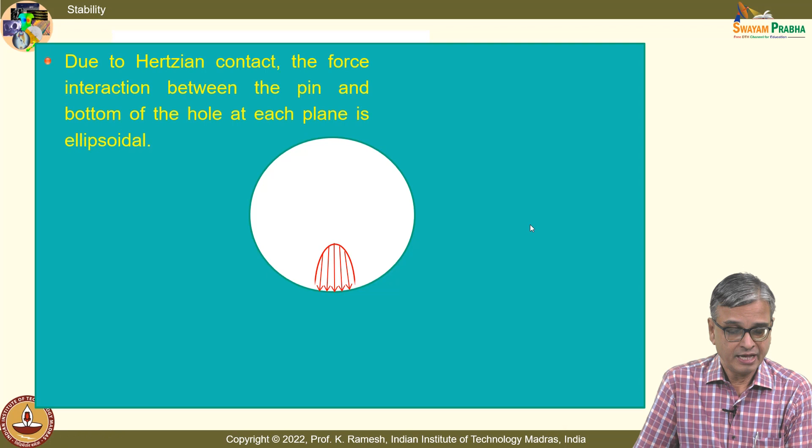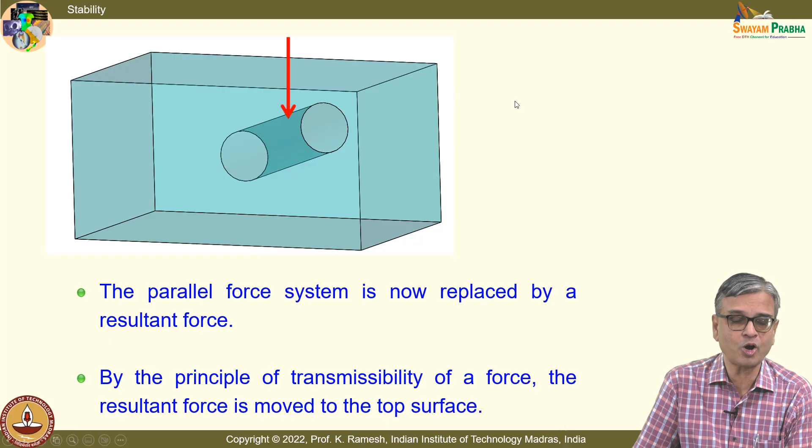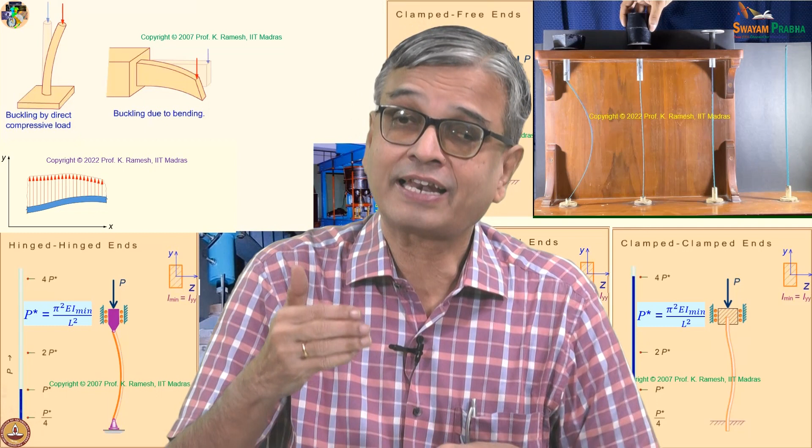You model this by a resultant, as a single concentrated force, and then you replicate this concentrated force along the line, take an equivalent value, then use the principle of transmissibility and move it to that point. So a simple problem where you have an end load put like this, when you physically translate it, has many aspects added to that. So transmissibility of force - you can move the force along its line of action.

When you want to move the force from one point to another point, you have to recognize you have a force as well as a couple. If you understand this, your bending is simple, torsion is simple, and engineering analysis is very, very simple.

So in this class we have looked at stability in a broader perspective. We have looked at different end conditions affecting the critical load. We have also looked at equivalent column length and discussed slenderness ratio, and we had a threadbare discussion on how you physically approach a problem.

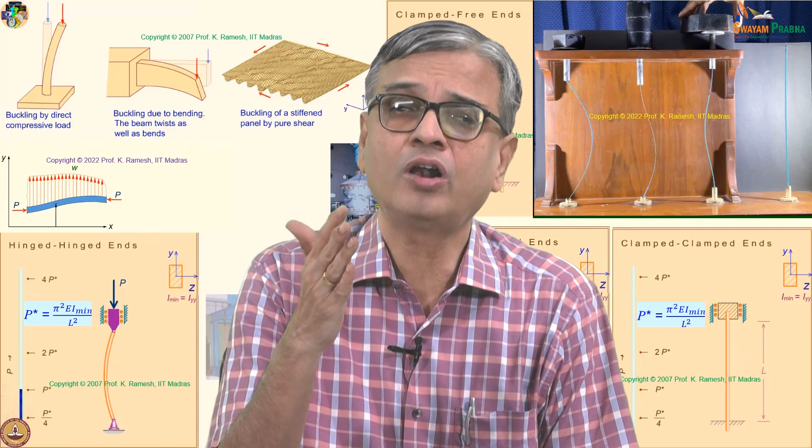The physical systems do not have the end conditions marked. As an engineer, you have to go, depending on the constraints, and idealize it as a pin joint or a fixed joint - and fixed joints are very difficult to build in reality. If you have a dilemma, always do two analyses: get the lower bound solution as well as the upper bound solution.

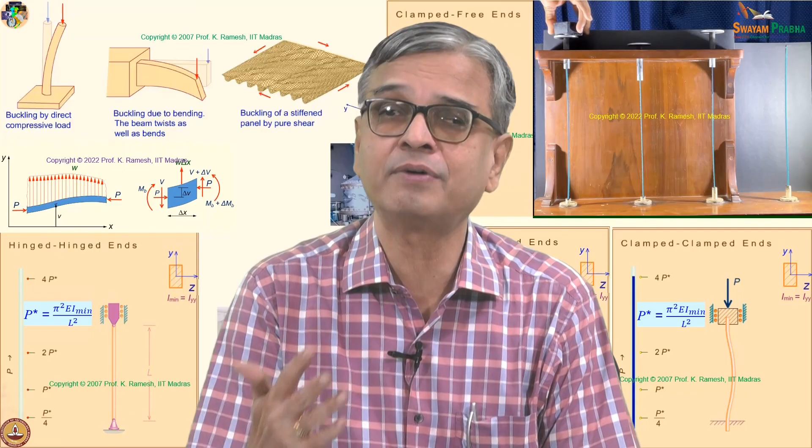I have also said, in order to motivate you to take interest in solid mechanics, there are very interesting challenging problems that are beyond this course, which really make human life much safer in the new emerging challenges. Thank you.